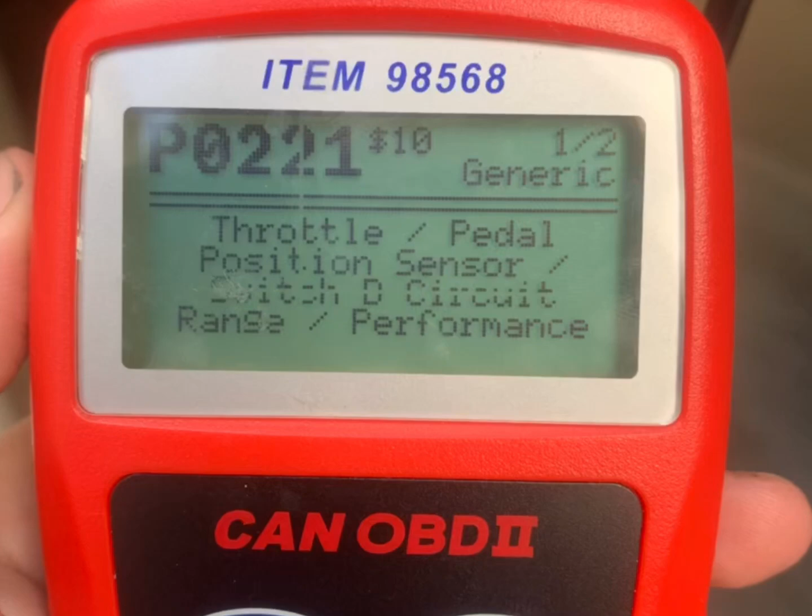Hi, Bob with Million Mile Garage. If your 2002 Nissan Maxima is not going anywhere when you push down on the throttle, I had this problem this week. Chances are you got a P0221 error code. That's what we got on our code reader, and I'll show you what we had to do.

We had to replace one of these.

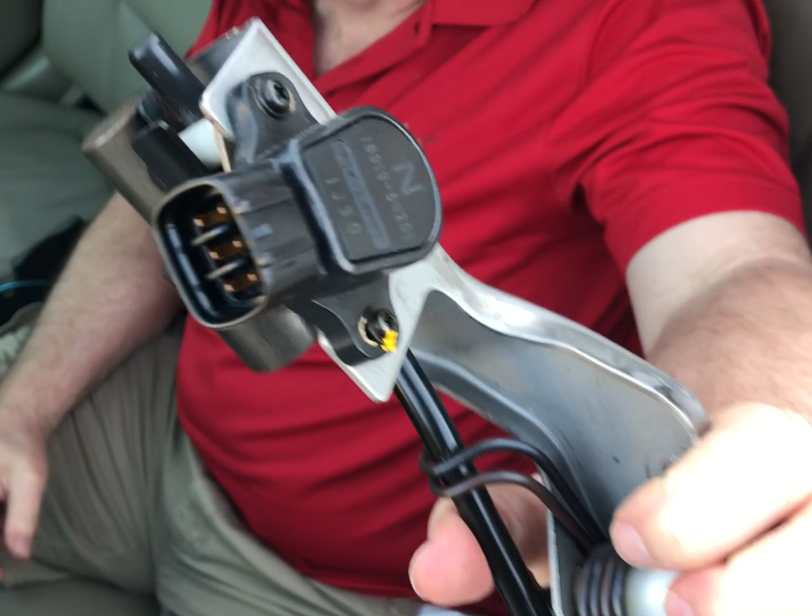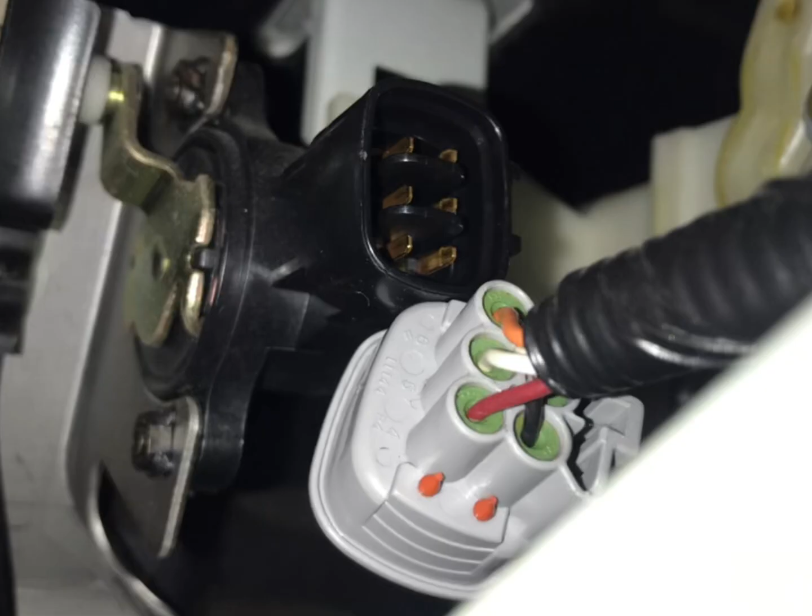The pedal assembly only has two fasteners, and they're shown here. It's probably easier to remove the connector first before unbolting the assembly.

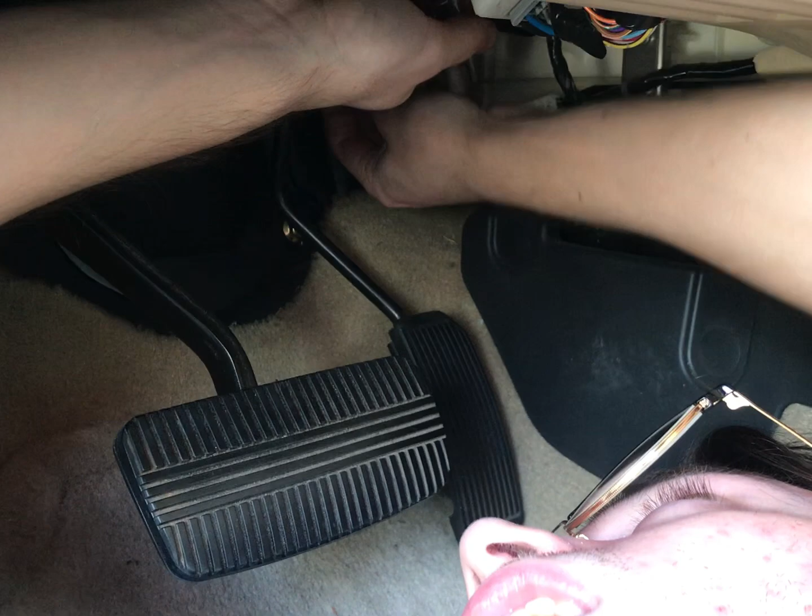I think I dropped the top bolt that's keeping the bottom one from coming out or something. Yeah, oh, there you go. All right. There she goes. Here, I'll grab it. Okay. Need a hand getting out? I'm just grabbing the bolts. All right.

And that's a Standard Motor Products APS161. Unfortunately, they won't sell you just the sensor, they make you buy the whole thing. I don't know why.

Let's take a look at what we got here. All right. Well, that's just wrapped around there, isn't it?

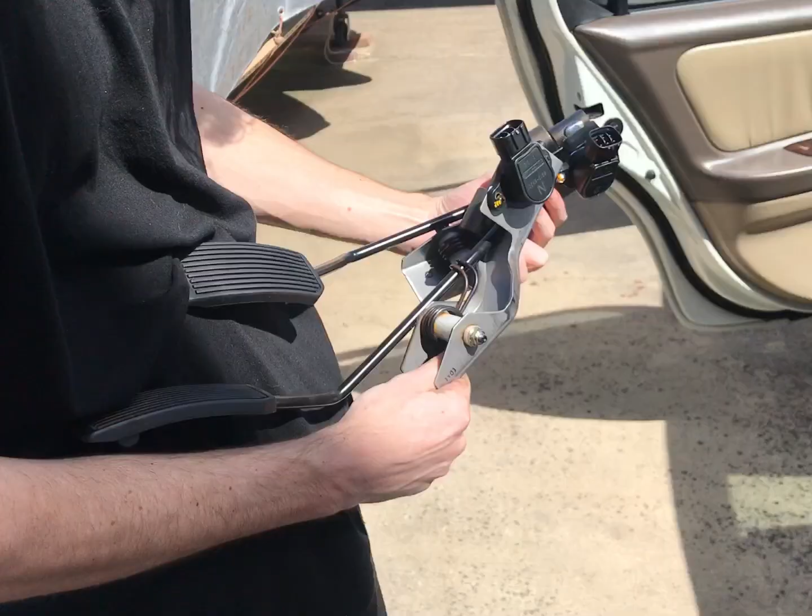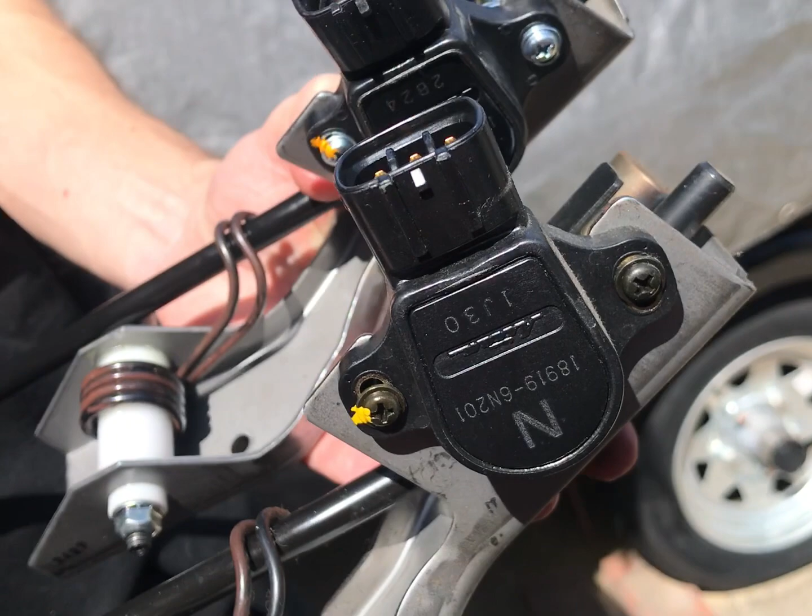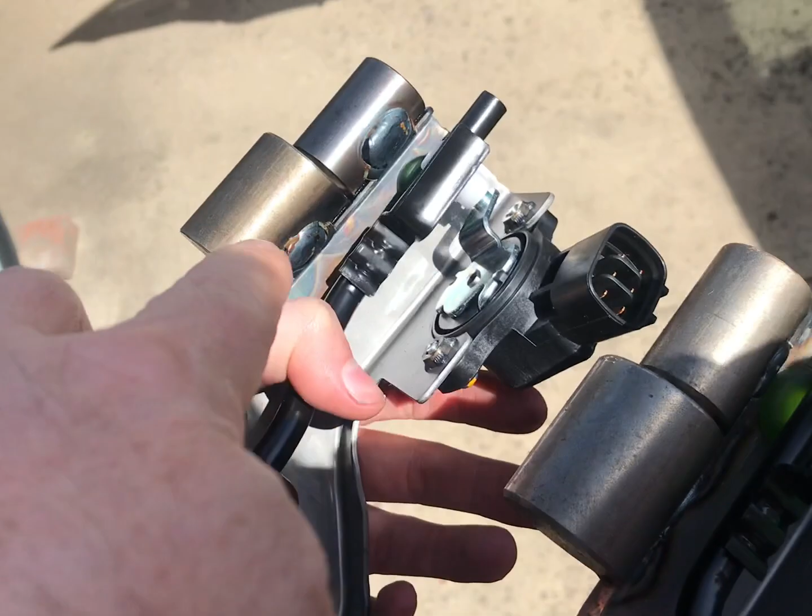Side by side, can you tell which one's the new one and which one's the old one? I know I can't unless I go down here. I can tell that's dirty, so that's the old one. We're just looking at the potentiometer on that side and then on that one. Other than the writing on the side, you couldn't tell one from the other. I mean, they look really identical. The weld on this one looks a little cruddier than the factory one, but other than that, I'd say they're dead on.

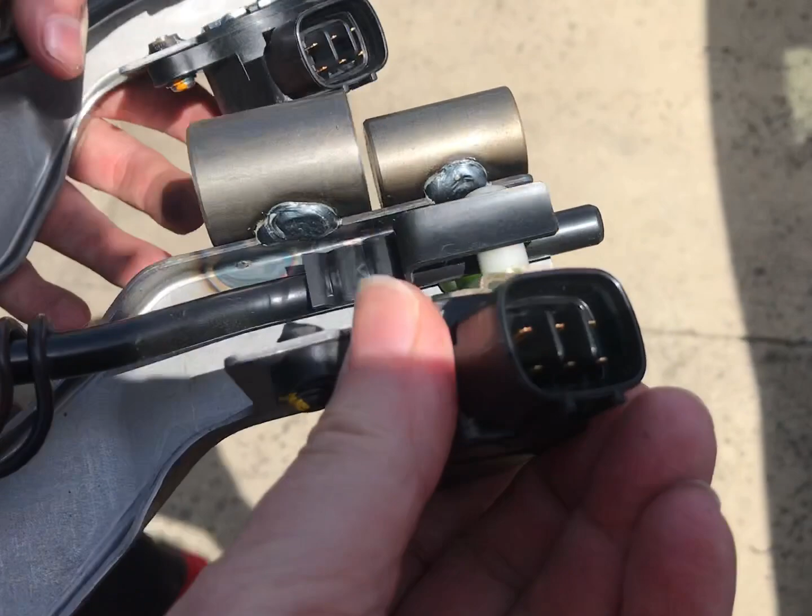So Austin's going to get that one back in the car, and that's where our connector goes. Just pointing out, I think when I released it, the release on the connector is on that side. You just have to pinch it right there and pull it out. It comes right out. All right, he's going to stuff that in there, and then we'll get it all connected up and see how she does.

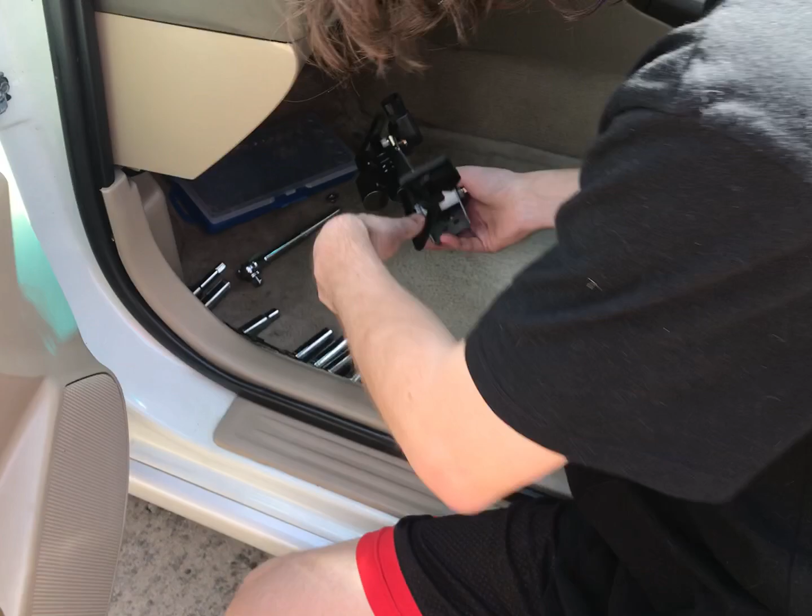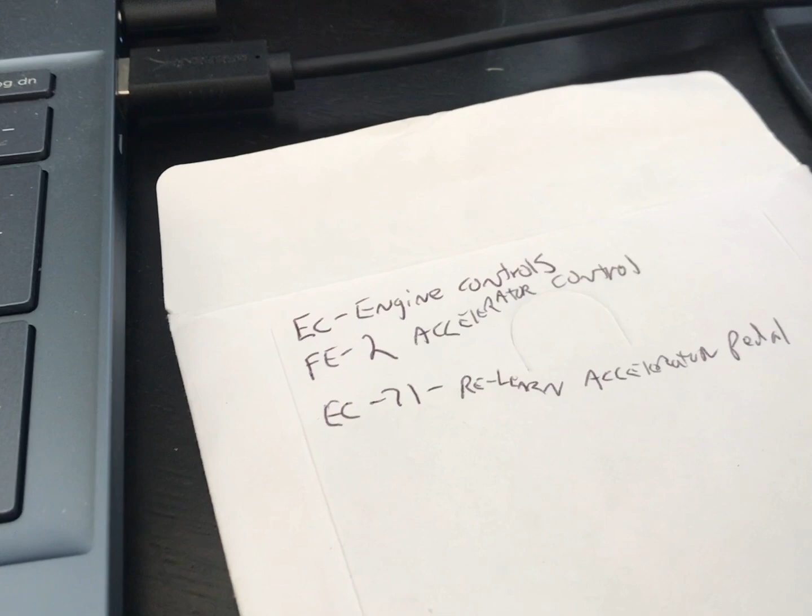I do have the shop manual on CD. I had to take notes. Looks like FE2 is where you remove the accelerator and replace, and then EC71 is the relearn portion of it. And of course, the remove part is pretty easy, so I'm just showing you the instructions here, the part I really don't know.

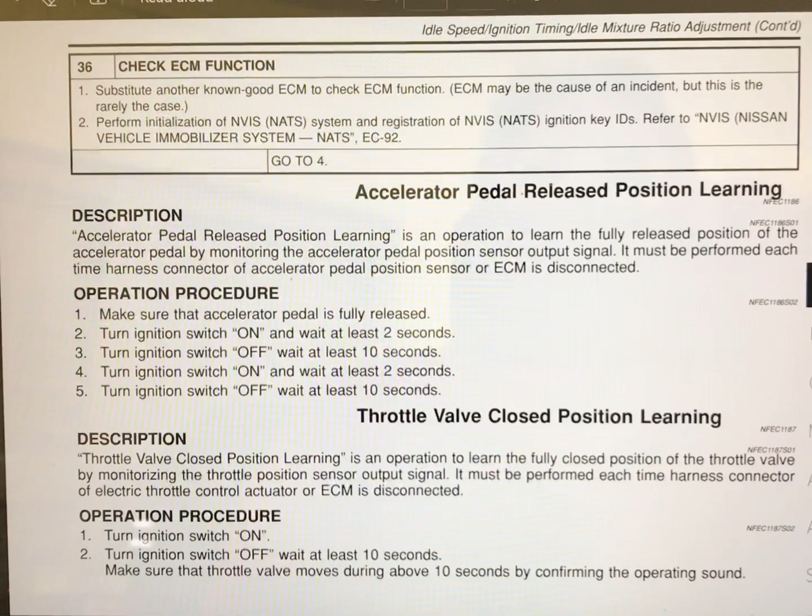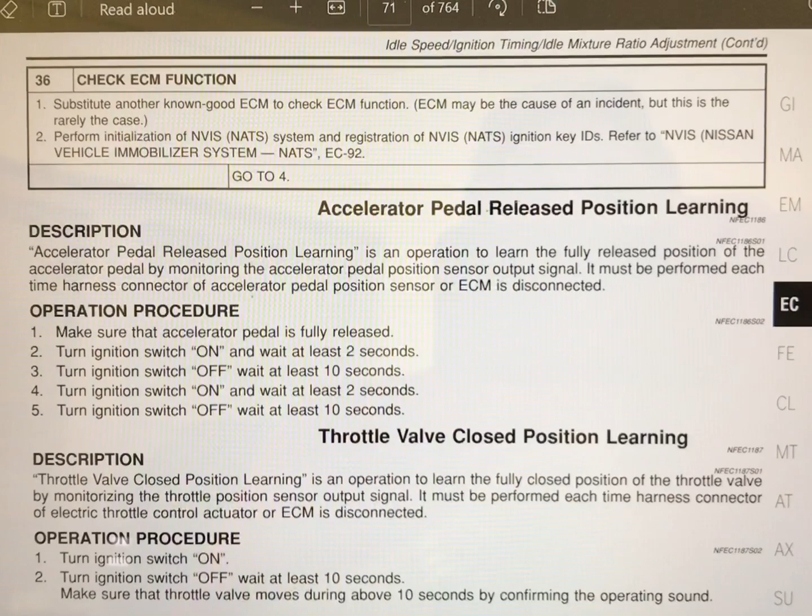It says accelerator pedal release position learning is an operation to learn the fully released position of the accelerator pedal by monitoring the accelerator pedal position sensor output signal. It must be performed each time harness connector of accelerator pedal position sensor or ECM is disconnected. Basically it says turn the ignition switch on and wait 2 seconds, turn it off, wait 10 seconds, and repeat.

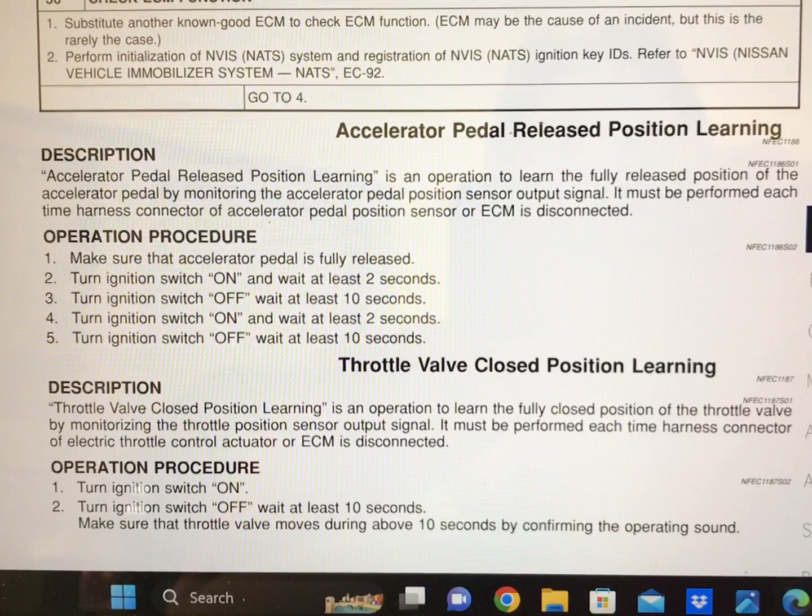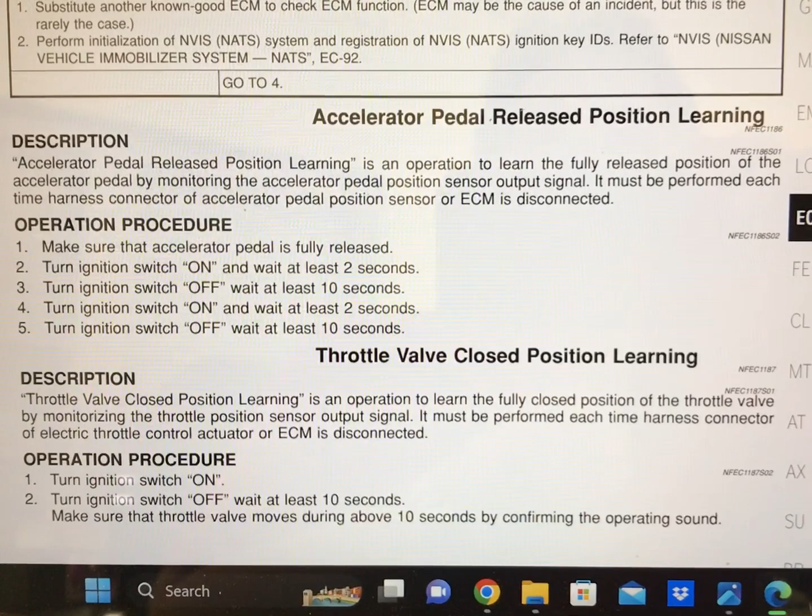And it's called throttle valve close position learning. It says description: throttle valve close position learning is an operation to learn the fully closed position of the throttle valve by monitoring the throttle position sensor output signal. It must be performed each time harness connector of electric throttle control actuator or ECM is disconnected.

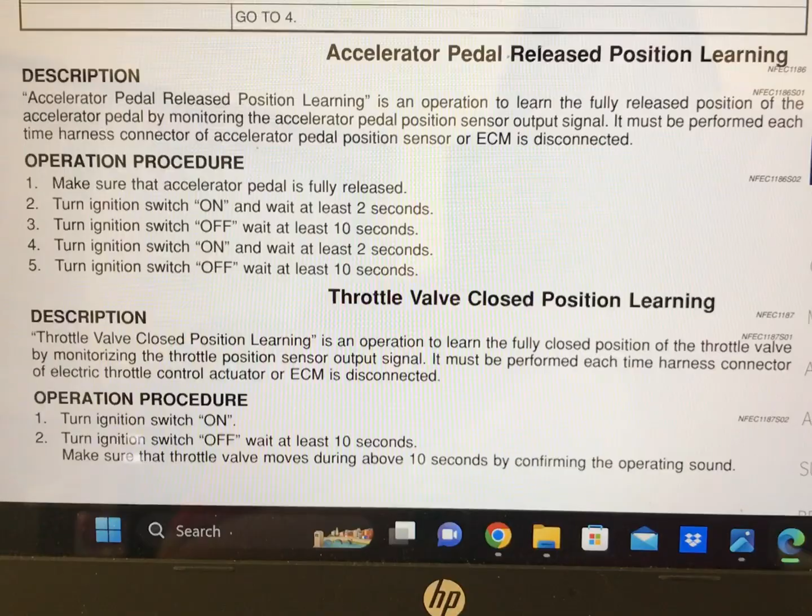Okay, and then it shows operation procedure: turn ignition switch on, turn ignition switch off, wait at least 10 seconds, make sure that throttle valve moves during above 10 seconds by confirming the operating sound. Okay, I'm guessing that when you turn it off, you have to go back under the hood and actually listen. I didn't know it did that, but okay, sure, we'll do that.

All right, we're just gonna do on 2 seconds, off 10. So I'm just gonna time it. Still gonna time it, there we go.

All right, off for 10 seconds. Just looking at my watch, looks like about 10 seconds. Do it again, okay turn it off. We'll sweep that for 10 seconds.

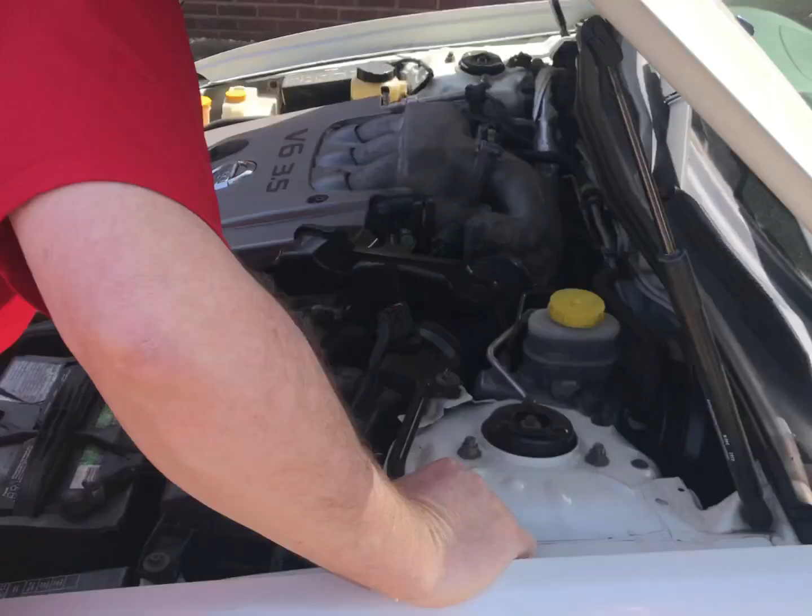Okay, it's been off 10 seconds. Now it says turn it on again for 2. Okay, and then turn it off, and you're supposed to be able to hear the motor go back. I didn't get a chance to hear it. Tell you what, I'll have Austin just flip it on for 2 seconds and then shut it off. We'll see if we can hear it.

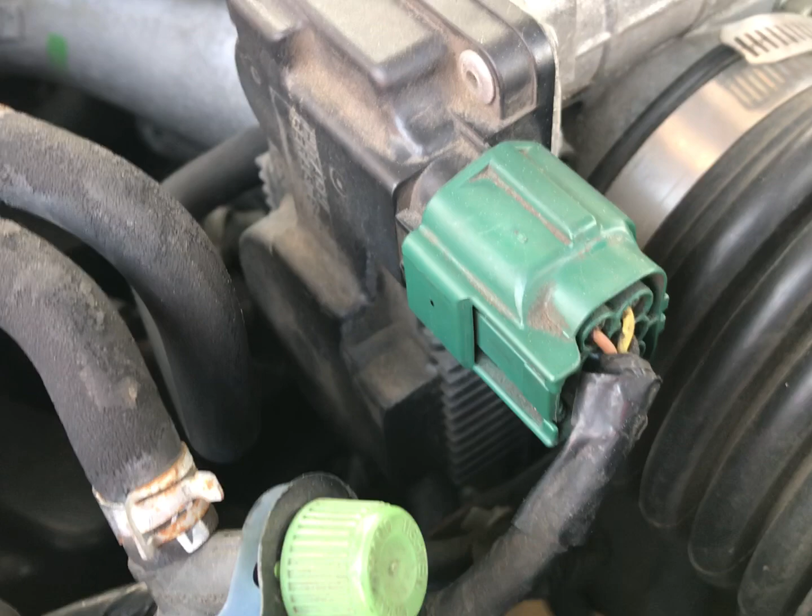Yep, I can feel it. How about that? I can feel it and hear it. All right, I guess the real test will be if we can see if we can still drive it.

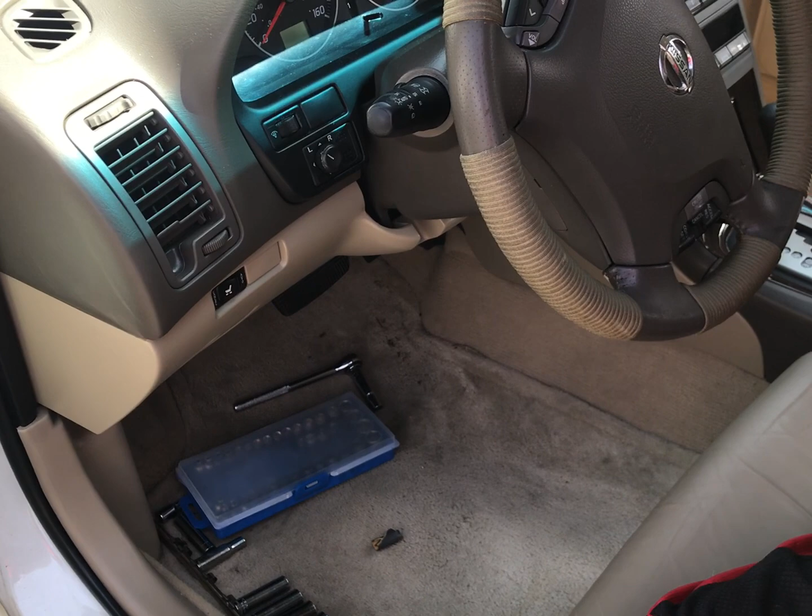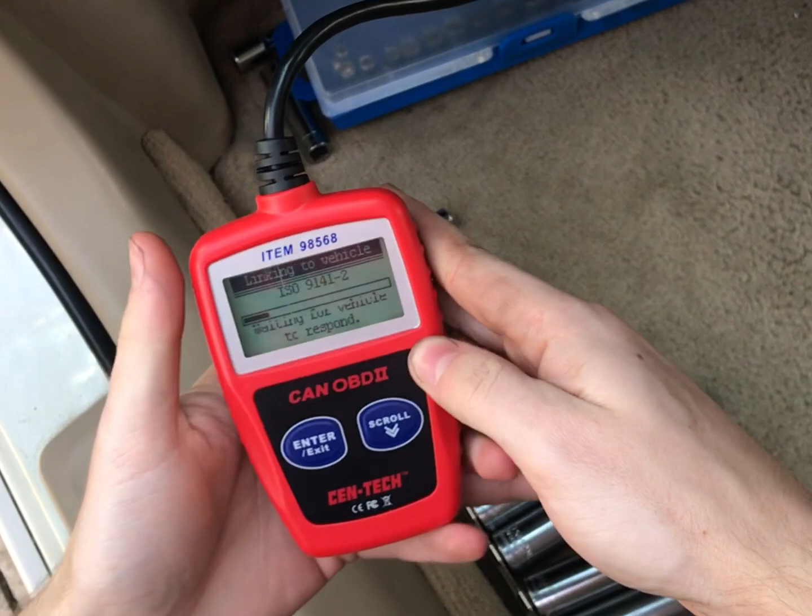I think we'll get Austin to clear the codes before we attempt to drive it. That way we'll see if it throws any more check engine lights, because it was lit up like Christmas this week when it did it. All right, just gonna go in. I'm gonna read the codes. It's probably gonna come up with that P0221 again.

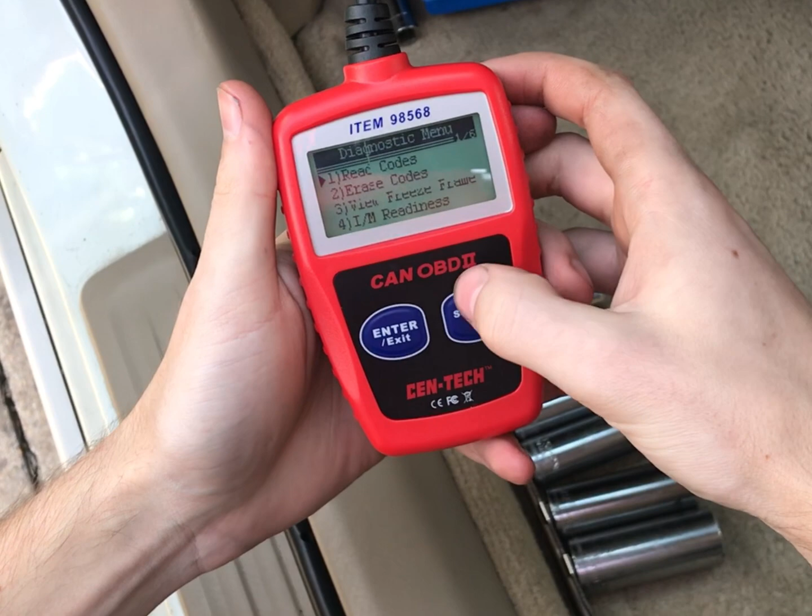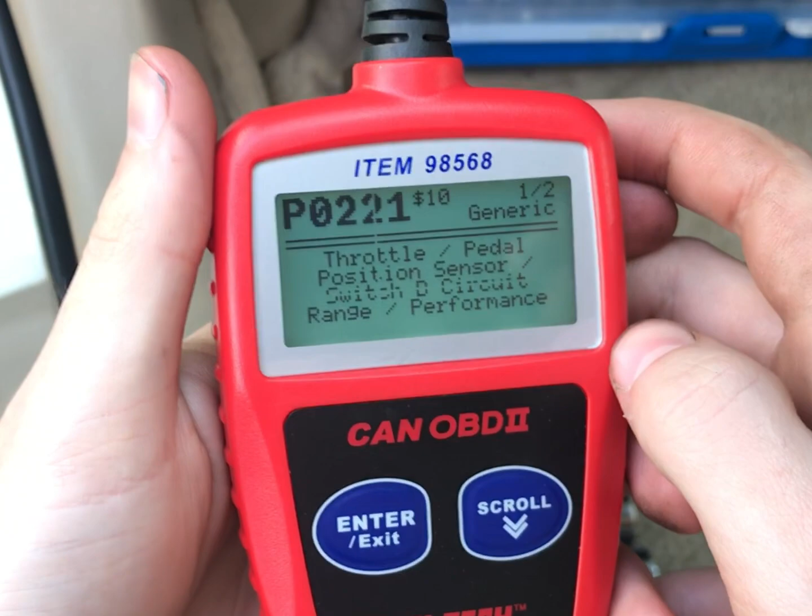Yep, go to codes. Yep, there's our throttle pedal position sensor, P0221. Yep, and then just go in and go back and erase the code. Erase done. Okay, now we'll attempt to drive it, or start it up at least.

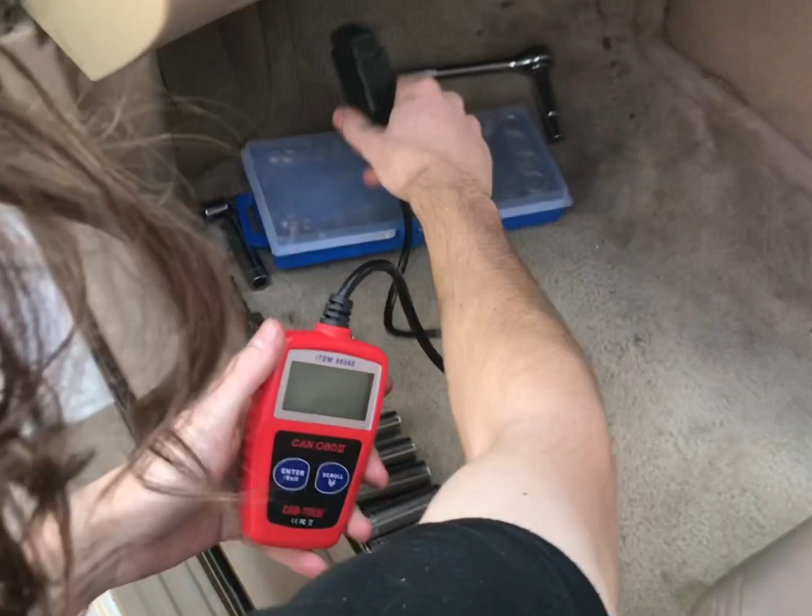Go ahead and start it, see if it throws a check engine light. Lighting's not the best here, but it's not throwing any codes. Okay, I think we fixed it. Cool. Blip the throttle one time. Okay, it's working. We'll take it out for a test drive.

Okay, we made it to Walmart, and we're still not having any check engine codes or anything. It seems to be driving great. Austin's just gonna put it in gear, we're gonna power out of the parking lot. It's starting to do this weird thing where it would kind of hesitate when you give it the gas sometimes, more noticeable cold than warm, but it was getting to where it was doing it all the time. The tune-up didn't fix that problem, so I guess maybe that's what it was. So kind of cool.